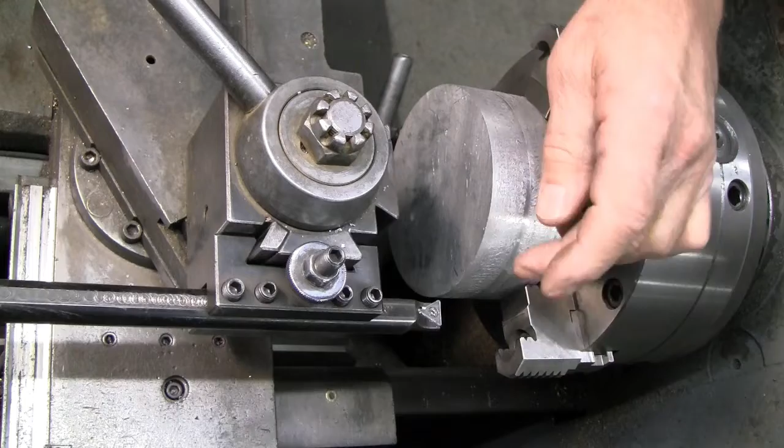I am set up here to dress off the outside diameter. Since I have the jaw set backwards, I'm going to use the boring bar to get in here, run in reverse, just to get this faced off. Then we'll be running in forward out here to drill

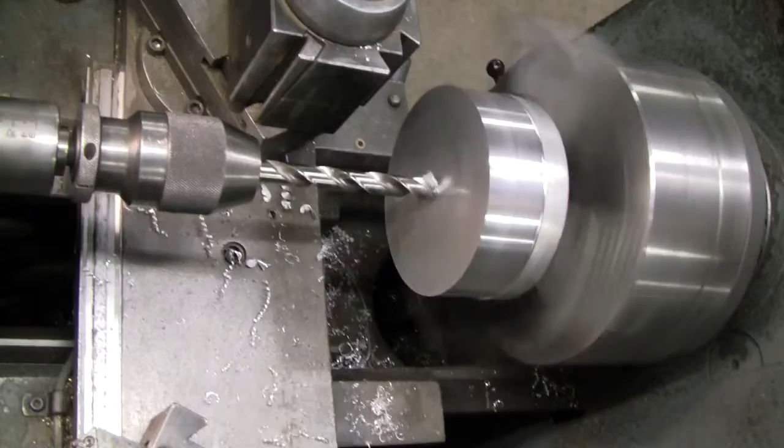and bore the ID all the way through to about 1.490. I'm going to use a series of 3 core drills, 4 flute core drills like this to get out to 1 7/16. Need a little bit less speed for this.

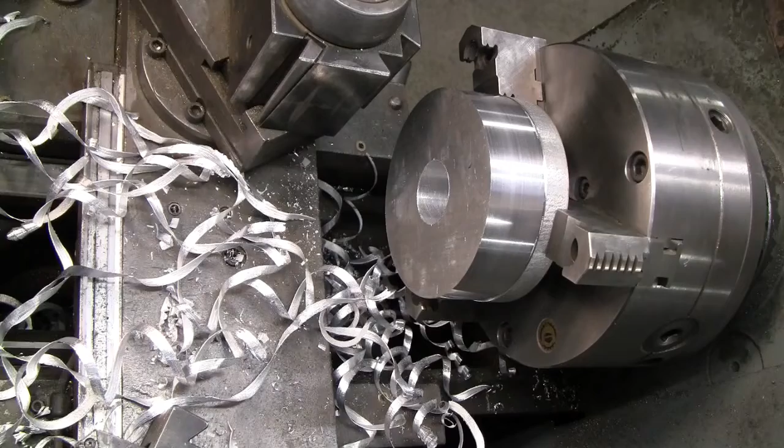Alright, that should put us at around 1, probably 440. That's probably a tiny bit oversize of 7/16. I'll set the boring bar up and get a bit closer. There's some heat in here, so I'll get close and then I'll let it cool off. These core drills are really good at turning stock into chips in a big hurry.

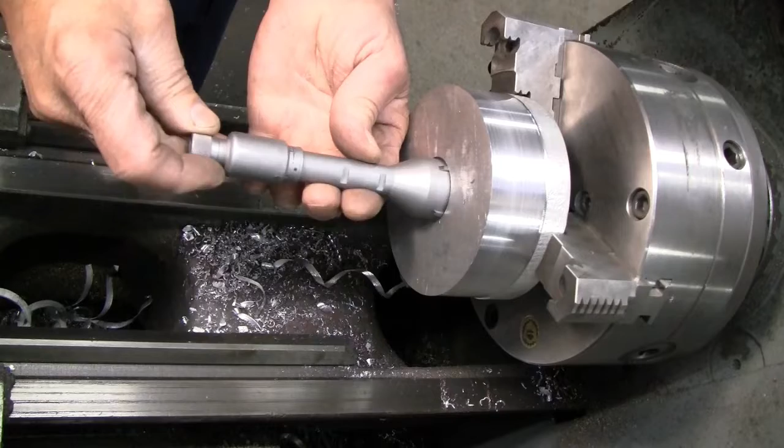And that should be pretty close. This is the only vaguely critical dimension on here, and it's just a clearance dimension. 491.5, I'm going to settle for that.

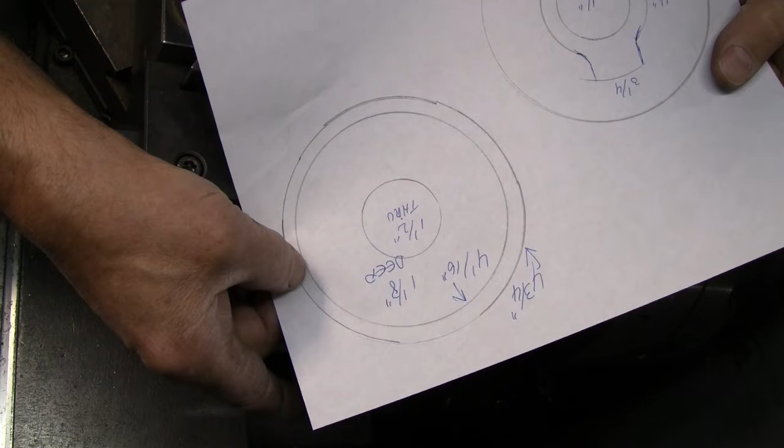And we'll come out here to... what did I figure? I want to come out to about 4 1/16. That'll be clearance for a 4-inch wheel.

Alright, let's take a 10 thousandths finish cut. I'm going to slow the feed rate down because we're pretty close. We're about 10 thousandths off.

One final check before we clean up the inside face here. I am feeling a lot of heat. I'm 2 thousandths under. I'd like to hit that fairly close. Well, that's just clearance for the stone. Let's just take about 3 more and do one more finish pass. This is not that critical, even if it does shrink a little bit, no big deal.

Let's put some chamfers on here. Maybe dress up that outside face. Can I get there with this? No, I can't. Let's try this tool, that might reach in there for the one in the back. Now we can do this one.

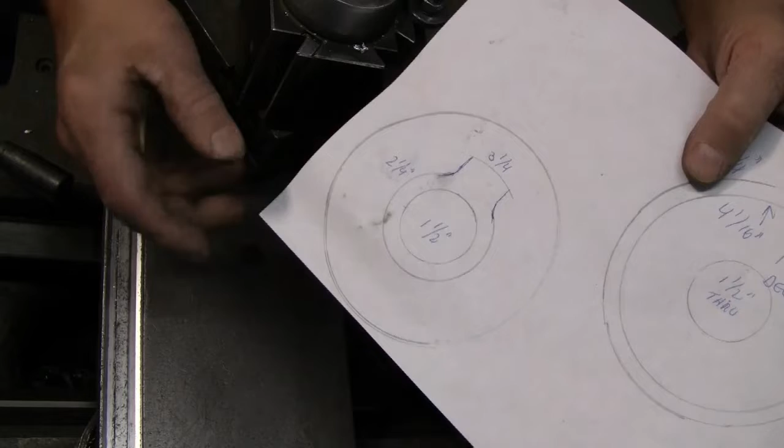Alright, time to turn the work around and start playing with the other side. I have set up to turn the hub of the wheel guard. I'm going to go 3/4 of an inch deep from the outside, going from about 4 3/4 down to about 3 1/4 on the OD of the hub.

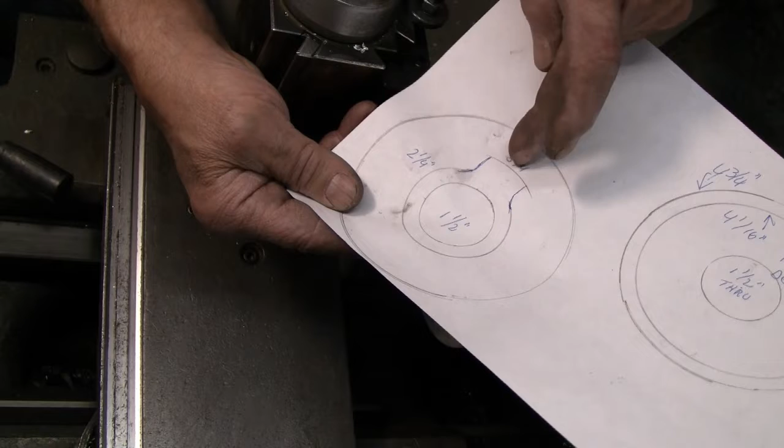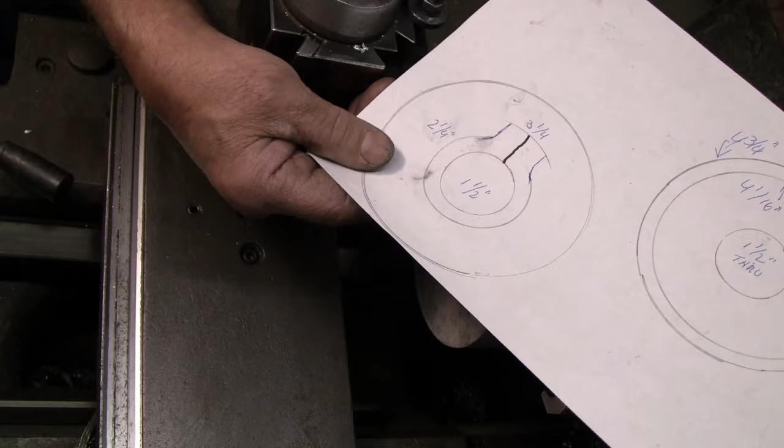Then I'm going to go to the rotary table on the milling machine to do this profile and leave this lug sticking up. That lug is going to get split like so, and then the perimeter of this ring will also get split partway around to provide a locking arrangement to secure the wheel guard to the

arbor on the grinder. I'm going to start with about 100 thousandths depth of cut, see how that goes. If it feels good, I'll increase the depth of cut. That would be 50 thousandths off the diameter, actually - excuse me, 100 off the diameter and 50 actual depth of cut. We'll see what happens there.

First 2 cuts were at 50 thousandths depth, 100 off the diameter. Then I went to 100 thousandths depth, 200 off the diameter per cut. And we are at 3 and 400, roughly, and we're looking for 3 and 250. So I'm going to take 140 this time.

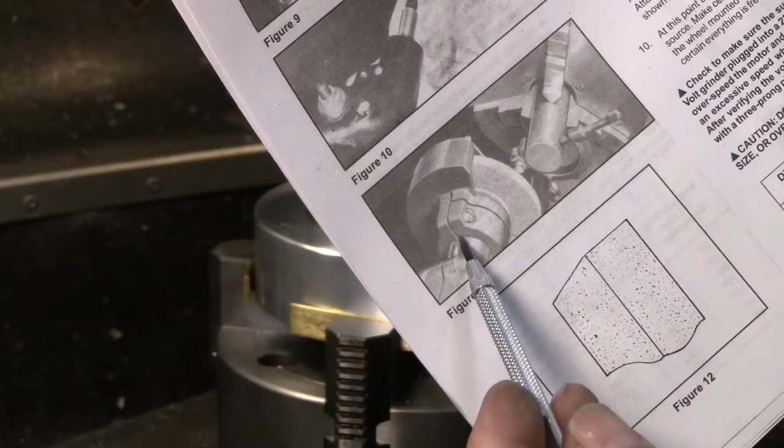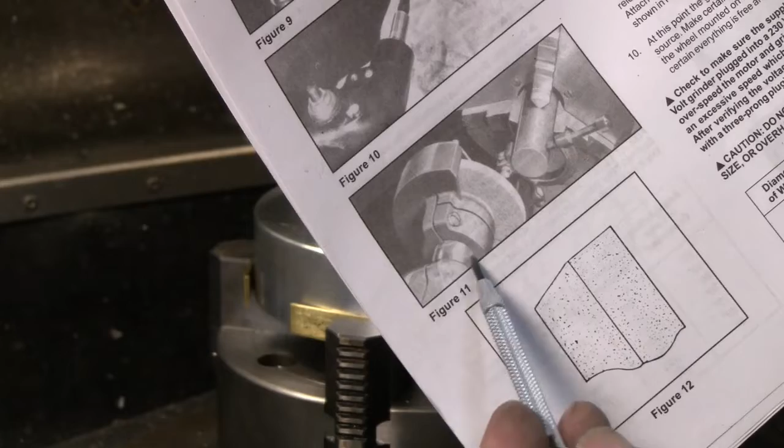I have two operations to perform here. The first, I think I can get this in the picture. First operation is to relieve where this clamp arrangement is going to be. I'm leaving about an inch at this point where the bolt will hold the clamp together, and taking it down, leaving about 3/8 of an inch on the part of the band that will flex.

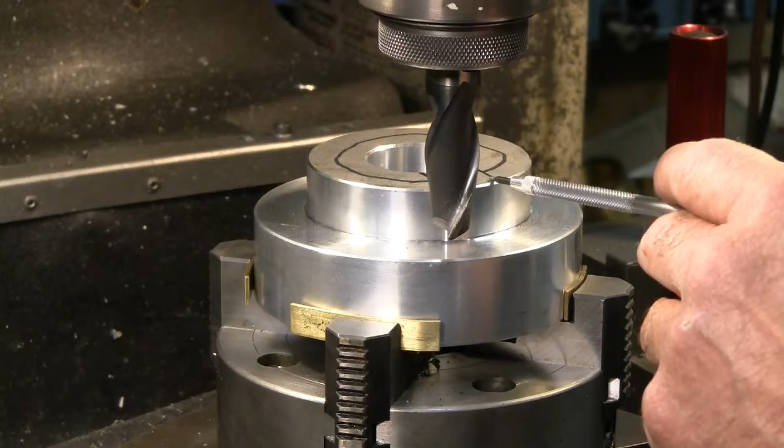So I'm going to come in here. I'm offset by half of the width of the bolt clamping area, which is 1/2 inch, and half the diameter of the cutter, which is 3/8. So I've moved over 7/8 of an inch.

That's what I'm supposed to have, but I don't see that on the DRO. Let's make that 7/8 of an inch. Whoops. There is 0.875, and then I'll run in without bothering to do a bunch of math. I'm going to run in 5/8 of an inch on each side of center on that feature.

A little bit of a bozo moment. I failed to lock down the rotary table, so I've shifted about 4 degrees and I can see it. Let's wind this over.

I can see it in my cut here. There's a step between the beginning of the first cut and the beginning of the second cut. So let's wind this back to 0 degrees, and I'll get a screwdriver and lock the table. I believe one lock will be enough. There's another one on the back that I can't get to, but one should be sufficient.

Now I need to loosen the rotary table. I'm over here on the right side to make a conventional milling cut. I don't want to do climb cutting on the rotary table because it's too hard to control. The cutter will try to take the work away from me.

So I have — well, first I have to come back to center, don't I? Because I want to rotate around this axis. So let's back off a bit, return to center.

Joe Pieczynski did some videos on rotary tables, and he said you just have to really pay attention to what you're doing, because sometimes you're working from an off-center mark, sometimes from an on-center mark. You go back and forth during the process of the work. You've really got to be careful to keep track of what you're doing. And I don't remember whether Joe had to lock his table in any place in his process, but let's remember — you got to lock your table.

So let me rotate the table around, bring this cutter in, and I'm just going to look by eye for this mark I need. I need a little more rotation, and I'll have to make a note of where I come to. Right now I'm sitting on 30 degrees. I think that's going to be pretty close. Let's see what happens. Keep your fingers crossed.

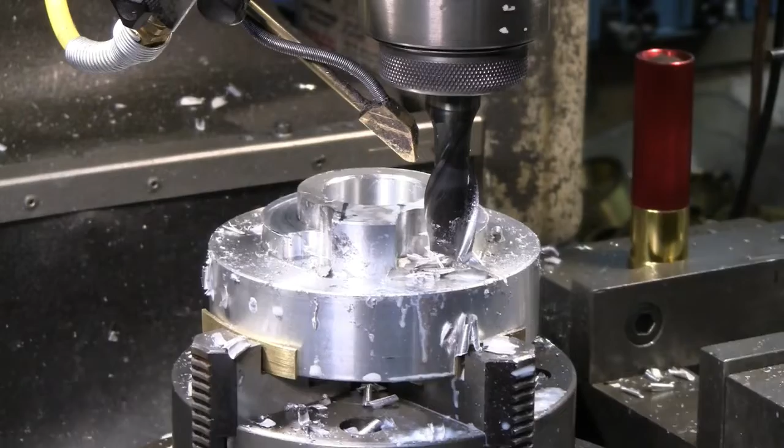That's not bad for a start. I'm at 1.490 from center, so let's go out. Keep going around to — it was a little over 30 — and come back to about 1.49. All right, let's see if we can do this again.

Back around until I have met the original cut in conventional milling. Now I'm going to dial in another 5 thousandths of an inch, or maybe 3 thousandths of an inch on the Z, a little in depth of cut, and I'm going to come back in the other direction and do a climb mill cut for finish.

Well, I'm fairly happy with that. I got just a little bit off kilter right here because of the table being loose, but for what we're doing, I don't think anybody is even going to be able to tell. It's not the least bit significant.

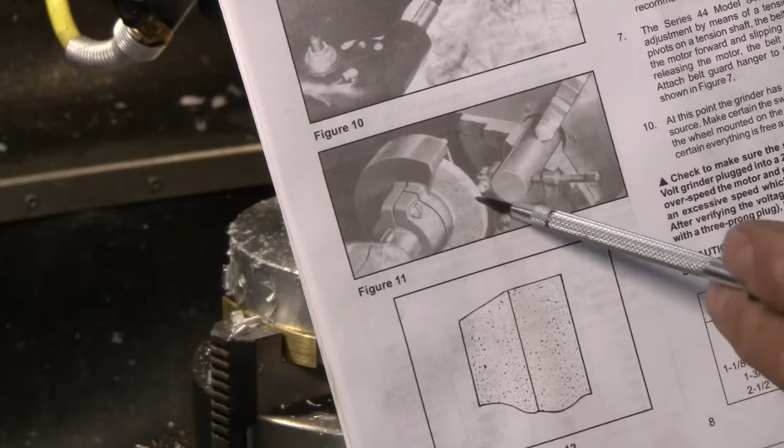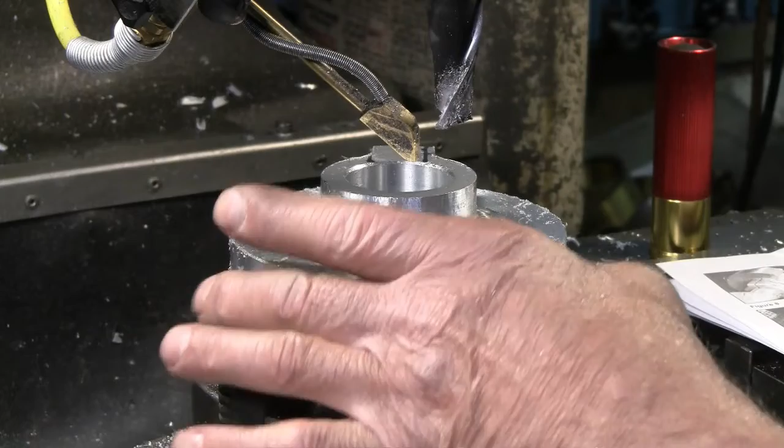We just did this feature for the clamp, and now we have to do this feature, which allows the wheel to access the work. I have decided to make at least the first couple of passes with this same setup where I've got a really good bite on the major diameter. When I grab it up here, it's going to turn into a much flimsier setup.

For this feature, I don't need two parallel surfaces like I did for the clamp. I can just go straight in on center, work around, and not have to shift back and forth. So let's see how this is going to work.

There's contact. Let's come up a quarter of an inch. 1, 2, and 50. And we'll see what happens there.

Now I'm going to start this cut with the lock set on the table so that it doesn't pull in like it did on the first cut. So let's see what happens here.